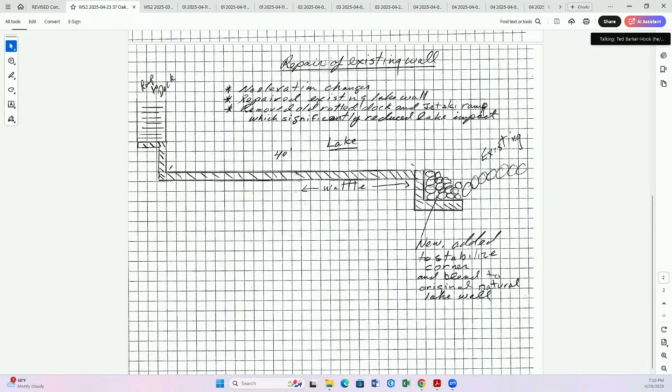I was looking at it, and I think you've done a fine enough job showing us where the wall is. Could you show me the other page again, please, Judy? Thank you. And where the dock is. So that's all great.

My initial reaction is this project is bigger than just the wall. As Judy mentioned, we do have the patio on the other side of the wall that was not originally permitted, which is within our jurisdiction. I don't see anything in your plan about the semi-repaired stretch that goes alongside the property or toward the lake. I did see that you filled it in with some gravel or cinder or something like that. I don't know if that is the permanent plan or if that is temporary to stabilize things, but there's nothing in these drawings that helps me understand that.

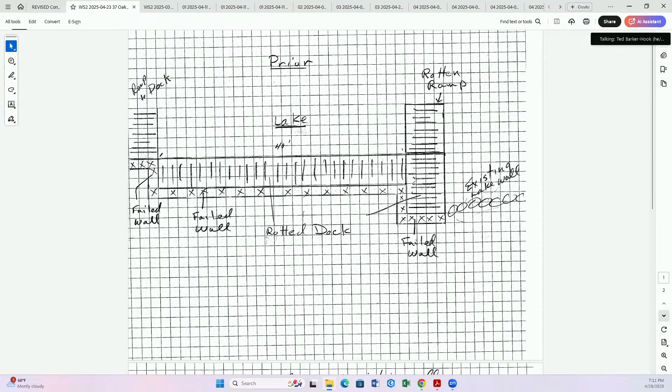Additionally, what I'd love to see on these drawings, and maybe Judy you have it, as we mentioned at our last meeting, when we've dealt with applications along Lake Maspenock, we're holding applicants to a standard of protecting the waterfront with plantings. I think Judy might have at her fingertips the information we've shared with a lot of homeowners. So what I'd like to see first is a plan that is more detailed and all-encompassing of the work that has been done and that needs to continue to be done.

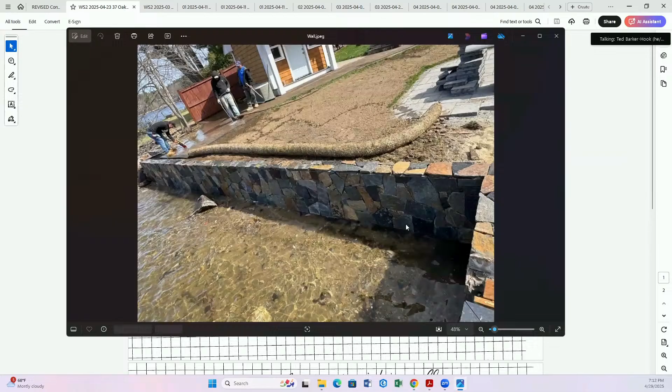And then before I open it up to the commission, a couple other things I happen to see. I'm curious, I don't think there's any description of how the wall was finished, what materials were used. I was assured the tarred cinder blocks were removed, but what materials are holding the new stones in place? What is the buffer between the stones and the cinder block wall? I would love to know more about that.

And then finally, it looks like from the photos, and that's a perfect photo for it, we still have straw wattle issues. That straw wattle right there is not staked down. And pretty clearly, if you can cursor over where there's debris right there, it's not being protected with erosion controls at all in that current situation. So I like that we're making progress is my first thought, but I think better plans and a bit more erosion control are probably called for.

Would you like to respond to any of that before I open it to the commission? Sure, yeah, absolutely. Would be happy to stake down the wattle there. And also, that's all been seeded now, that slope on the other side from the previous photo has been strawed and seeded as well.

The material that was used was natural stone veneer to reinforce the cinder block wall behind it, so that when the lake waves and everything hit it, the joints from the cinder block won't deteriorate. So you guys allowed me permission to go ahead with that work, before the water rose. Fortunately, we got there just in time to do that.

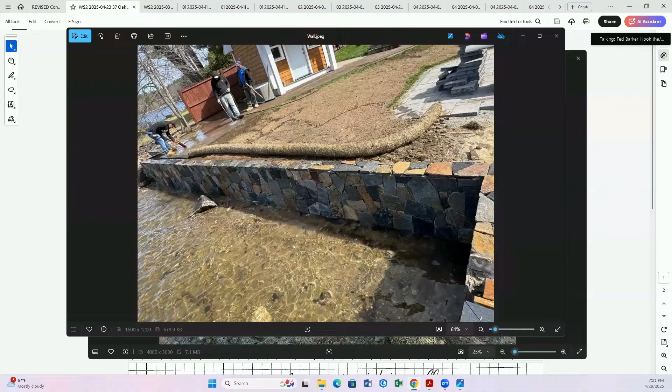That looks like a no. Through the chair, this is Ed. I just have a simple question: the height of the wall. Is it... what is the height?

I don't know, I'm guessing 2.5 to 3 feet. The elevation was never changed from the old. I'd say let's say 3 feet. I don't know exactly, but it was never altered in any way.

Anything else from the commission? Just to say hello, I apologize for being a little bit late. Oh, don't apologize, we're happy you're here. How's North Carolina? It's very windy, but it's been in the 80s, so that's pretty good.

Mr. Holmes, did you install the patio that we're seeing the edge of, or was that there underneath all the garbage when you bought the property? No, that was a part—there was a patio there. It was sinking at the time with the old dock, so we replaced it with new patio stone.

Okay, it had like an old red brick pattern that he also used for his basement floor, because his floor—he never put French drains in, so he just puts old stone, patio stone down in his basement at the time. He's clearly a gem. Yeah, oh—2 dumpsters of trash off the lake.

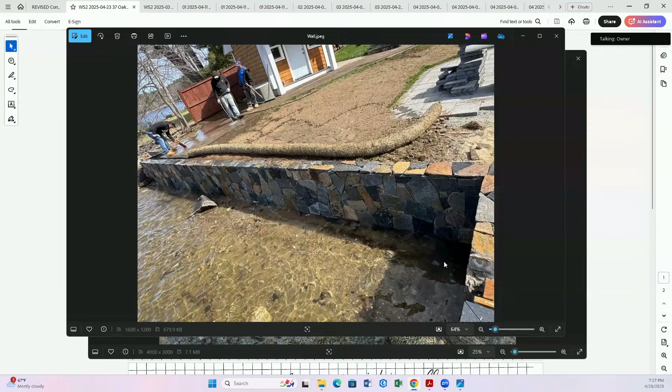Then also that slope going down, I have in the past put some down like a U shape at the very base to capture way down to the right, to capture anything during a really heavy rain, just to capture any runoff that goes down that way too. So we have it on the left side as you see it, but I think right down at the very bottom I would like to put some more down there, because after pulling so much out of that property, he buried the house two feet deep above the sills with trash. He was a very sick individual.

So you're clearly getting everything back to normal grade. I know there's certain trouble areas, and that would be one. You are clearly making it look more attractive. We just want to make sure that we do it with all proper documentation and approvals.

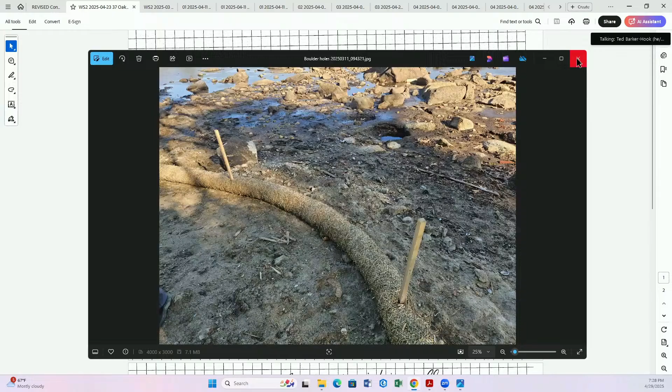All right, we're going to move on to new hearings. We have three new hearings tonight, which means I've got to read some paperwork. Let me see if I can find the first one.

Mary, what is that? Oh, it's this one, okay. This one has a lot of property locations, so bear with me everybody.

The Hopkinton Conservation Commission will hold a public hearing on Monday, April 28th, 2025 at 7 p.m. virtually online to hear all persons interested in an amended notice of intent filed by the town of Hopkinton for changes at the intermittent stream crossing to the proposed school entrance driveway. Location: 0 Hayden Row, Assessors Map U23, Block 33, Lot 0; 0 Hayden Row, Assessors Map U23, Block 35, Lot A; 129 Hayden Row, Assessors Map U23, Block 28, Lot 0; 147 Hayden Row, Assessors Map U23, Block 32, Lot 0.

LTC Myrtle Avenue? What's LTC? Help me with what that means. I think it refers to lot, but it's just how the assessors have it. Oh, LT is for lot. Lot C, Myrtle Avenue, thank you.

Lot C, Myrtle Avenue, Assessors Map U23, Block 60, Lot 0. Lot B, Fitch Avenue, Assessors Map U22, Block 68, Lot 0.

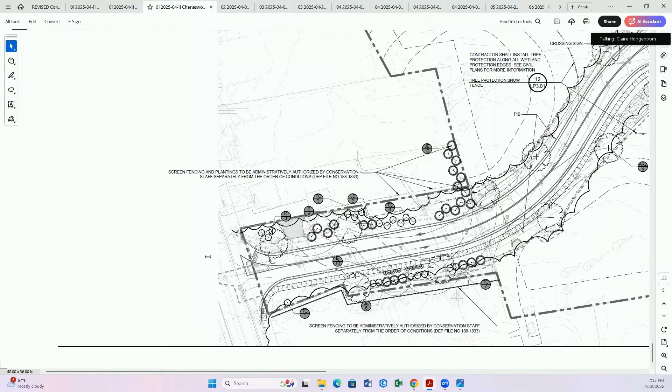The landscape plans also have only native plantings proposed within the buffer zones. That is a revision that was made. As you see, there's a couple of arrows pointing to plantings on the parcel to the north, and fences off-site on each side of the driveway entrance. Those notes specifically state that those features will be administratively approved by the conservation staff outside of this order.

Of conditions, as we discussed at the April 8th meeting as well. I believe that covers everything. I think we provided full-size sheets of these revised plans to Judy and Anna at the Conservation Office, so they have that on file. But we can provide a compiled PDF as well for your records after we get through tonight's meeting.

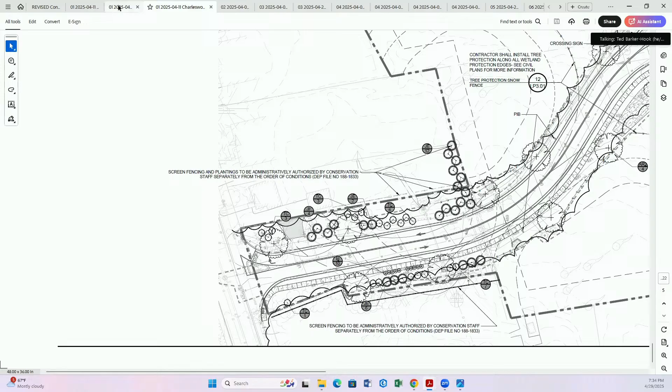Great, thank you, Claire. Neither Melissa nor Matt is here right now, and they're kind of our water experts, so I'm going to ask you to dumb some stuff down for me because I don't fully understand what I see on the plans. Could you help me understand how the two catch basins on either side of the driveway work? How does the water move? How is the water being treated as it heads back into the stream? Is it being treated? Just walk me through the flow of water.

Sure. Judy, would you mind zooming into that a little more? So you can see there's a lot of gray line work that's off-site, but on the north side where you see the wetland flags or the bank flags is where the stream flows south onto our site. At the catch basin shown above two of those flags, that's where the stream will enter the culvert, the replaced culvert, and it continues about 700, maybe more, feet underneath multiple properties, and it daylights again well south of our site.

So where you see the solid line of that replacement culvert, on the south side where there's a circle with a D inside it, that's the replacement location between that and the catch basin. So the water flows above ground north of our site, and it continues to flow through a culvert within our site as it does presently. But the culvert will just be replaced to ensure that when the driveway is installed, there's no question or risk of it collapsing after the town worked so hard to construct this project.

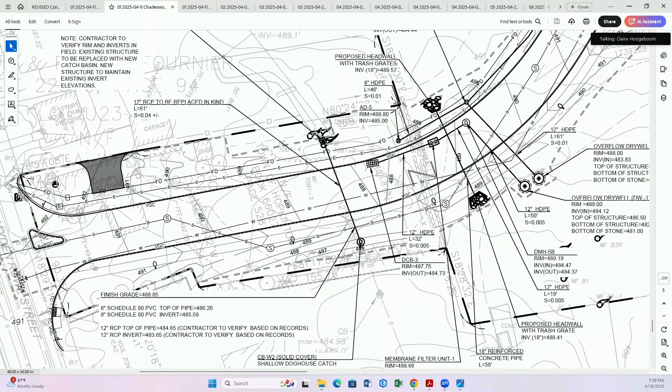All right, moving down the agenda, we have another new hearing. This is for Bay Path Humane Society, 66 Fruit Street. The Hopkinton Conservation Commission will hold a public hearing on Tuesday, April 29th, 2025 at 7 p.m. virtually online to hear all persons interested in a notice of intent filed by Bay Path Humane Society of Hopkinton for the installation of underground utilities. Location: a portion of 66 Fruit Street, Assessor's Map U3, Block 13, Lot 0, and a portion of 66B Fruit Street, Assessor's Map R6, Block 8, Lot 0.

I believe we have a representative from Bay Path here. Elizabeth, are you there? Yep, I'm here. Elizabeth, there's no reason you'd remember this, but in my very first term on the Zoning Advisory Committee, you guys came in front of us as the very first step to where we are now. So 10 years ago, Ted. Everything old is new again. Certainly is. Can you tell us about your project and why you're here?

Yeah, so if it works for everyone, I'll just do a quick overview of Bay Path, and then I believe Scott on our team will fill you in on the details. My name's Elizabeth Jeffress, I'm the executive director, I've been with the organization for 14 years. Thank you for taking the time tonight. Bay Path has been in town since 1977, so 48 years in Hopkinton.

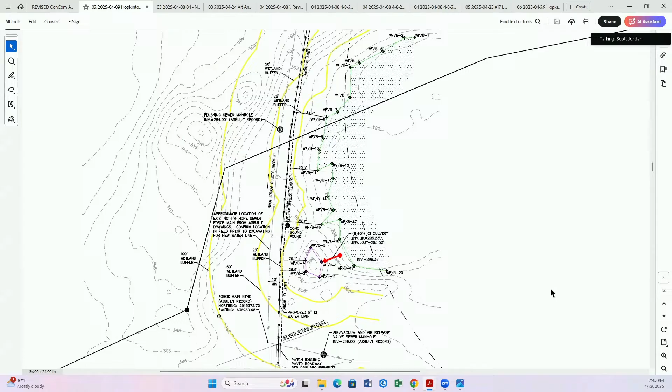Trench within an existing gravel cart path, backfill, and we'll be done. And if you have any questions, I'd be happy to try to answer them. Great, thank you very much.

So just to let the commission members know, unless something has changed since yesterday afternoon, Bay Path doesn't have a DEP number yet. Is that still true? Yes, so we won't be able to close no matter how happy we might be with all of this. So this will have to be continued later, but it doesn't mean we can't discuss it and learn about it.

Joe, have you had a chance to look at this? I have. Want to share with us your thoughts? Sure. I did get out and have a chance to review the wetland delineation, and I was in general agreement with the flagged wetlands on the site. There were a couple of flags missing around the ground, but based on the obvious slope and adjacent flags, I think the locations indicated on the plan were appropriate.

I didn't see any or find any additional wetland resource areas that would be of concern within 100 feet of any of the proposed work, not just the water line. I did walk the entire site and the perimeter of the entire site.

I did also note that although not mapped as any potential certified vernal pools out there, there were areas within both wetland C and wetland B that appeared as potential vernal pools. I didn't spend a lot of time looking for any critters. I did do a quick look and didn't see any evidence of any salamander larvae or any tadpoles or any egg masses, but I think it'd be worth a look maybe with a dip net just to verify that.

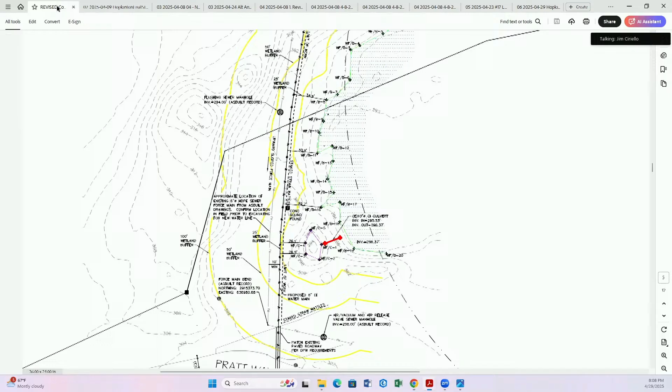We'll see you in a few weeks. Thank you all, sound like a so much. You sound like a game show host here, Ted. I sound like a game show host? Yeah, thank you all, appreciate it. I don't know how to respond to that. I don't know if that's a compliment. I don't know, say thank you. Say thank you, that's all you have to do. Okay, thank you, thank you very much. With the passing of Wink Martindale, maybe I'll step in his shoes. You forgot to say that this is being filmed in front of a live audience, too.

All right, we have another new hearing. Although it's property we've seen before, we have a brand new notice. The Hopkinton Conservation Commission will hold a public hearing on Tuesday, April 29th, 2025 at 7 p.m., virtually online, to hear all persons interested in a notice of intent filed by Yuan Li and Rui He to construct a single-family house, driveway, and associated work. Location 30 West Main Street, Assessors Map U18, Block 32, Lot 0; 0 West Main Street, Assessors Map U18, Block 33, Lot 0; and 0 Elm Street, Assessors Map U18, Block 19, Lot 0.

Welcome to the Conservation Commission. Is there someone who is ready to fill us in on what you've got for us tonight? Yes, good evening. For the record, my name is Sam Malafronte. I'm a civil engineer with Solli Engineering. Our offices are based in Norwood, Mass.

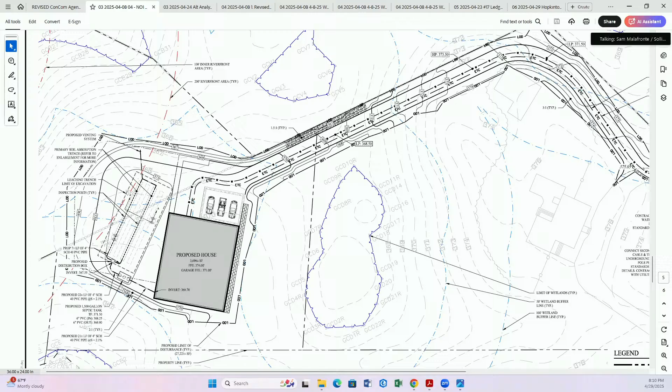Judy, I have a short presentation if I could share my screen, if that's okay. Sure, okay, make sure you have sharing privileges. All right. Don't see your screen yet. About now. Yep, that looks good.

So for the record, again, Sam Malafronte, civil engineer with Solli Engineering. I'm here on behalf of the owners, applicants, Rui He and Yuan Li. I believe Yan is on as well, I saw her name earlier. So we're here before you. As chairperson mentioned, this project was before the commission a few months ago, and it was withdrawn formally, so we could resubmit the notice of intent.

And I can just take you through a brief presentation. I'm sure you guys are relatively aware of this project site. It's basically the property between Elm Street and West Main Street. It is heavily inundated with resource areas along the northern and western side of the property, running parallel to Elm Street, the Indian Brook does. It's about 7.59 acres in total.

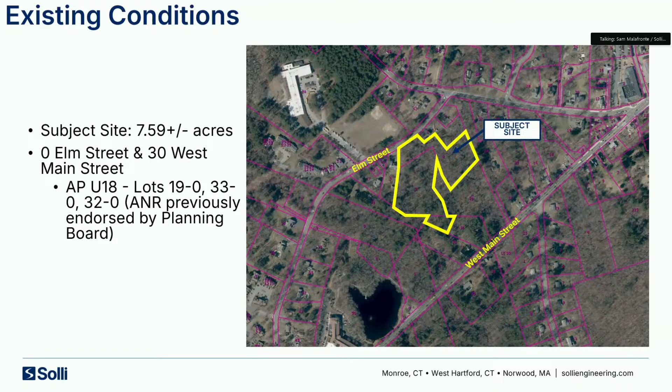The delineations were approved by this commission in May 11, 2023 under an ORAD. And this image that's shown here was included as part of the permitting plan set. It just gives a good representation of the wetland areas, the watercourse areas, which are shaded in gray. We have the riverfront 100-foot inner riparian and 200-foot riverfront shown in red, and then we have the wetland buffers 50 and 100 shown in a lighter blue.

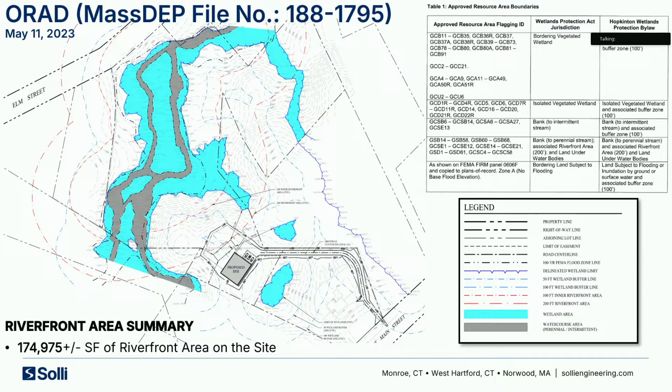Very similar to the previous application, the single-family home that is proposed is proposed to be accessed through the 30 West Main Street property, as the only accessible path to this developable upland area located on the 0 Elm Street property. I could take you through a zoomed-in image of the site plan. I know previously in the application, it was shown as 2 potential driveways. After an evaluation took place, it was determined that the eastern driveway, which was originally proposed, was the more suitable location and proposal.

So that is the path, or the project, that's proposed in front of you. We are proposing a 430 linear foot driveway. I have been in communication with the fire department - I know that was brought up by one commission member at the previous hearings. We are proposing to traverse the property line, the eastern property line, through the West Main Street property, go around the existing barn that's out there, and kind of hug the property line.

The grading has basically a 2-to-1 or 3-to-1 slope off of the driveway to minimize disturbance and impact to the property. We're proposing a geocell driveway, which is a plastic reinforced, gravel-based driveway that provides structural stability and minimizes impact to the subsoil. That's the goal of this driveway design, and it allows us to access the upland portion of the property.

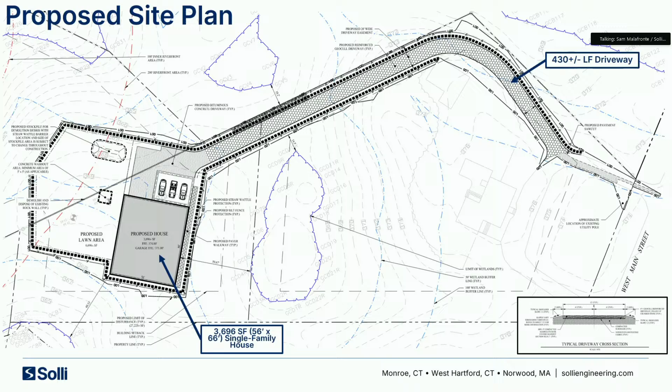Okay, yeah, I apologize, I wanted to know about the septic — the septic system. On our site layout plan, we don't have it shown, but it's shown very clearly on the grading and utilities plan as well as the overall site plan. We try to put layers on so it's easier for reading purposes.

Yeah, no, I get that. Yeah, no, I know that one. Yep. Thank you. Thank you, Jim.

Any other commission members with initial reactions or questions? I guess for initial reactions, mine would be: this is a huge project, a huge house, a gigantic backyard, and a large concrete pad on an area that only has a small upland area to build on. So that's my initial reaction — it's quite big for such a challenging, small buildable area.

Thank you, Janine. Other commission members? I would echo the general thoughts that have been expressed. Thank you, Ed. Oh, Matt, you're out of the car. I'm back in the house, out of the car. As long as you spoke up, do you have any thoughts initially, or do you want to sit on this a bit? No, I don't have any initial thoughts.

I think one thing that jumped out, we got to talk about PIDs at some point, of course. But other than that, I'd like to see this advance a little bit further, hear from Joe and get a little more info.

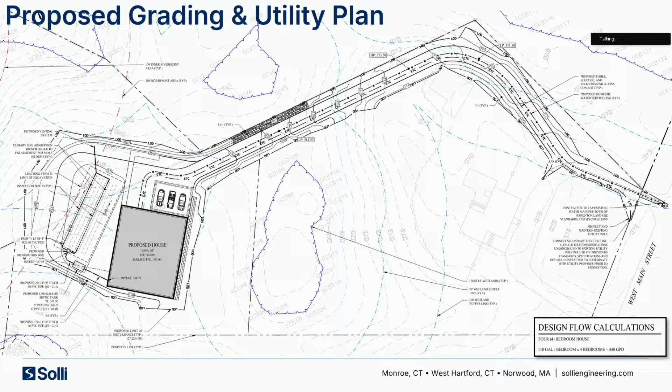Understandable completely. Any other commission members? Do we have any comments from the public? None. That surprised me. Okay, so I think what we need to do is continue, get a hold of, go ahead.

I'm sorry, Sam. I just have a quick question. Commissioner Moyen mentioned, I think, PIDs. What is that acronym? Sorry if I'm not familiar with it.

Okay, good to know. I'm sure we're going to get a comment, but I can work on getting that addressed too. Great.

Okay, seeing no more comments, are you open, Sam, to coming back on the 13th? Yeah, the 13th works. Judy, I'm not sure how long typically the turnaround for sending out comments is, but if we receive them this week, we could hopefully give them back to the town and Lucas for another review, maybe a week prior to the 13th, if that aligns. If not, we'll have to continue to a later meeting. But let's shoot for the 13th and play it by ear. Yeah, I'll get you the review this week. Okay, awesome. All right, great.

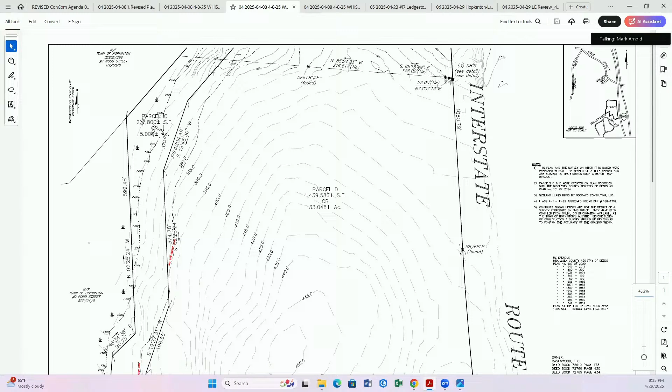The plans do show a portion of the northern end of the wetlands, although it's basically just one of the last flags that extends off to the north. That property is a separate property, not part of this ANRAD. We just show the connection. Joe, we can update the plans to pull back slightly so we show flag F29, which is on the northern property, under a separate order of conditions valid at this time. So the line shown is connecting to F29, but we can show F29 just to show the continuity of the wetlands from that northern property, which has an order of conditions, to the new property itself.

And I know you looked at that line as a whole. You just want to make sure it's shown for clarity, and that makes absolute sense, and we appreciate that's a good comment to have from you.

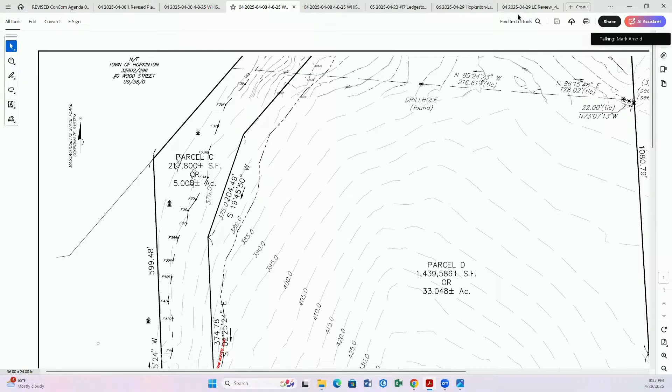The next comment Joe had was in terms of the ILSF calculation. Just to recap what we discussed with the commission at the last hearing, there are two large isolated vegetated wetlands, the S series and the T series, and we ran the ILSF calculations for both. We determined that the T series is a very large isolated wetland that clearly would meet ILSF volume calculations, so we drew the extent of ILSF based on the topography of that wetland.

ILSF is based on the ponding and flooding of a wetland to where it extends to the maximum extent, and then eventually it can't flood higher in elevation—it has to spill out, it goes somewhere else, like a dam cresting. So if the commission and Joe looked at those plans, you'd see the spot elevations at the extent of ILSF, shown in red in that exhibit plan—you start seeing spot elevations below elevation 402. That elevation is the spillover point, to where after 402 the ground drops down like a spillway of a dam, and there will be no ability for water to be retained within that wetland before it would spill out into the upland around it.

Again, this is sometimes ILSF is theoretical—if it ever did flood to a certain extent, it would raise this amount. It's unlikely unless there was a massive storm of over 100 years potentially. But that's basically the methodology that DEP has for ILSF.

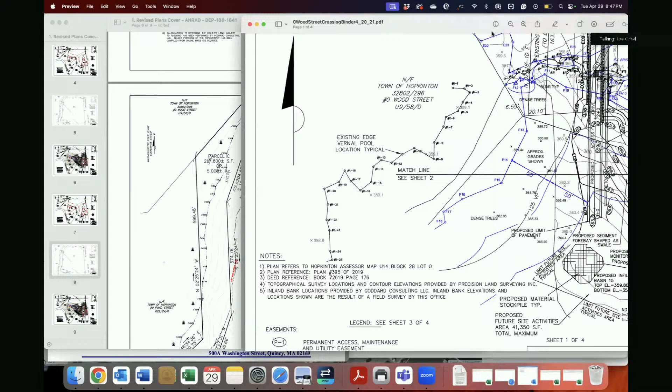Yeah, I think if you scroll to the next sheet on the order of conditions plan, where it runs south. Oh, you're right. Hold on, you're right. There we go, a little bit closer. Oh, I'm sorry, hold on, something's going on with the PDF.

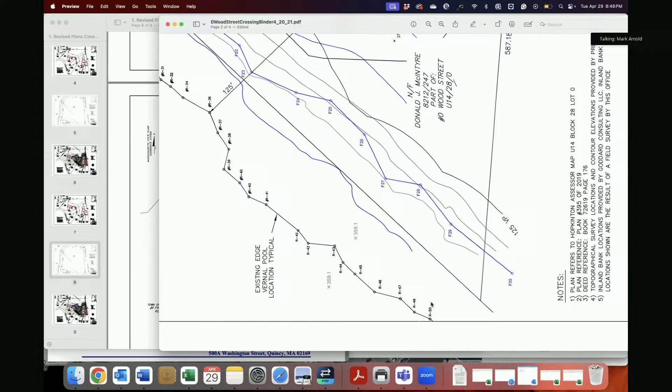So here's, yeah, so there it runs a little bit closer, but I think in a few spots it might get close to being within 25 feet, but I think... Yeah, we did have it running. Yeah, you can see it runs about over 50 feet interior to the wetland line.

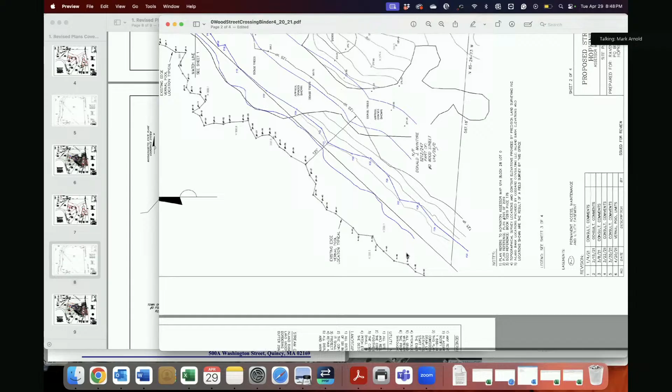Is the vernal pool itself back in that area there. But we can show, I think we might have some data above this, so we can show that data, Joe, there, just as a point of clarification. Yeah, I think it would be important just to have that buffer line on the plan, just for any potential future considerations of work in that area.

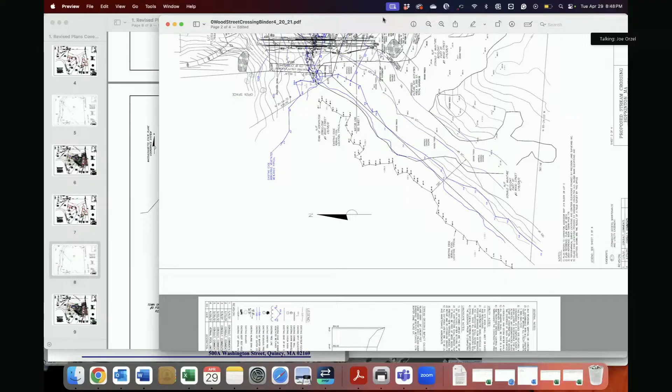Through the chair, yes. I would echo that sentiment that Joe just had for the other areas where he questioned whether or not there are vernal pools. Moving forward, if and when a project happens on this site, one of the first things I imagine we're going to ask as a commission is, are there or aren't there vernal pools? Because you're not asking for that to be decided as part of this ORAD. So given we're at the close of the vernal pool season, my suggestion would be to try to go out there and put eyes on it, and get us some information on whether or not, in your opinion, Mark, or your biologist's opinion, that there are or are not vernal pools.

Thank you for that comment. Put you in a better spot. Thank you for that comment.

You, Mark, ran through a whole bunch of stuff very quickly, and I'm impressed with Joe being able to say, wait, you didn't respond to this or that. I was not able to keep up quite as well. But Joe didn't raise this question, so you probably did address it. I'm looking at comment H about whether there is a stream or culvert present, which apparently is on mapping. Did you respond to that comment?

And if so, could you just remind me what you said? I did. There is a stream that our series of wetlands should be called bordering vegetated wetlands, so we'll update that on the plans. It doesn't really change anything else. It's just an intermittent stream, a culvert that provides hydrologic relief because of the raised roadway on Valleywood Road.

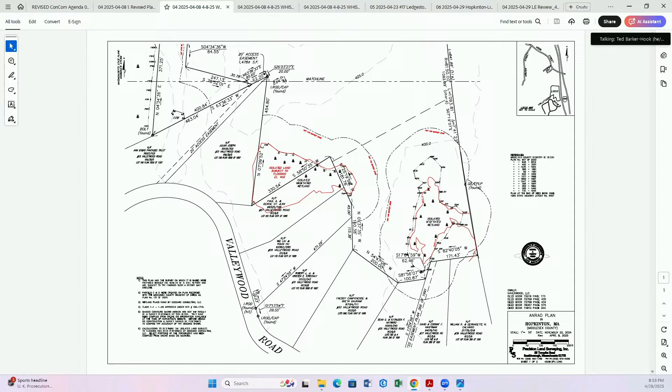Mark and Craig, we'll see you in a few weeks. Thank you so much, have a good night. Welcome. And with that, I'm afraid I need to vacate my office here at school and go home.

Just to let you know, Matt, we got through all the work session items except for public forum requests. And hopefully you saw the updated agenda that the 47 Oakhurst Road has already been continued. All right, so we've got 2 items left.

I wish I could stick around, everybody. See everyone on May 13th. Oh, I did want to say this. Commission members, Hopkintonians, please go to town meeting. I know it's a long slog. It's democracy at its finest. It's our town, please be a part of town meeting. I'll be there, I'll look to say hi. With that, I'll say good night. Night, Ted. Good night.

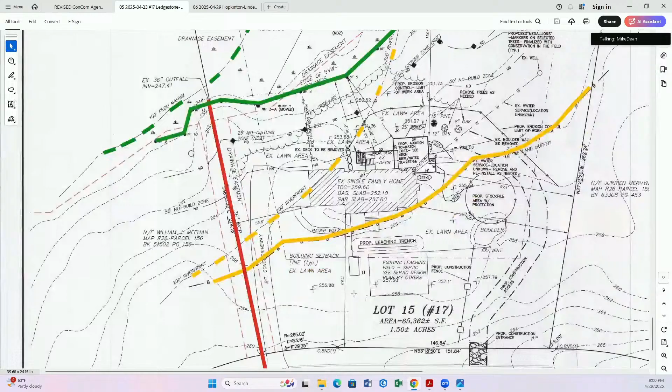Construction access has been added to the plan. Judy, if you could just scroll down a little bit, up off to the right. So there's a construction access, chosen for a couple of reasons, off to the right-hand side, and that avoids coming off the end of the driveway, the existing driveway, back on the opposite side of the house, which is in the riverfront area. So we chose this location to avoid the riverfront.

A stockpile area has also been added to the plan. That's off to the right of the house, and to the left, in that curve area of the access construction roadway, and that is outside the buffer zone.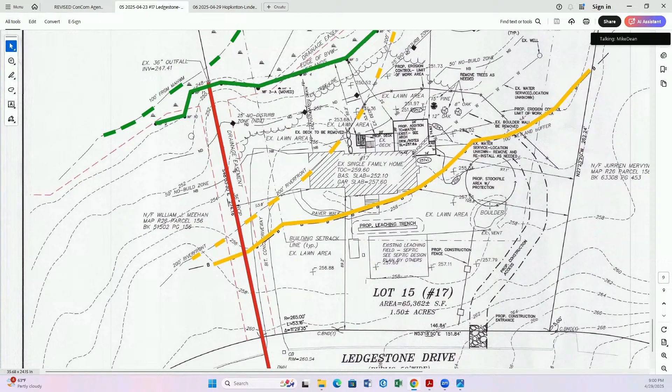Another revision was the erosion control from the original plan and the limit of work that's shown there with the line work and the X's. We've moved that in closer to the addition, and we also wrapped that right around at the 200-foot riverfront, keeping everything out of the riverfront and not accessing down through the end of the driveway.

Also in the review letter, there were some other items listed as requiring further discussion with the commission. Proposed medallions have been added to the plan, located at the 25-foot line - those are the diamonds - and a note added to the plan as well stating that those will be proposed medallions located on trees and finalized with the commission through the process. So the note even gives the ability to adjust it.

A couple of other comments in the peer review letter suggest further conversations with the commission - the lawn extends beneath the tree line, and further discussion should take place regarding the restoration of the 25-foot no disturb zone. Another item is that 3 trees are being removed for the project. Those are shown on the plan off to the back right of the proposed addition, and we should have a conversation about mitigating or replanting those.

I talked to - and I forgot to say that the applicants are online here. I'm sorry, the Collards are online also.

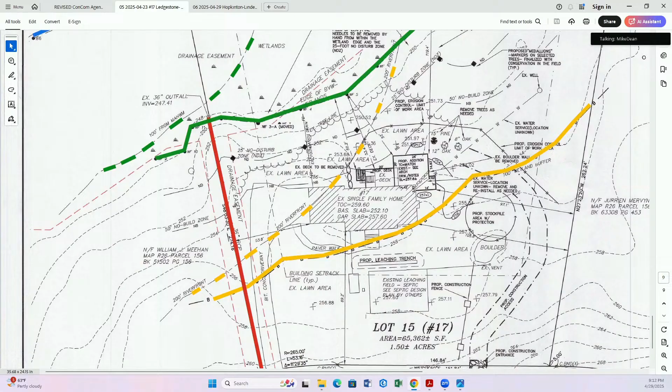Thank you, Mr. Dean, I appreciate your time. Okay, yes, thank you, see you on the 13th. Yep, thanks for your time as well. Have a good night.

All right, moving on to our last item for the evening, continued hearing for Banyan Lane and 4 Linden Street, request for determination of applicability for demolition of a single-family home and site work. Do we have a representative from the applicant on the line? Hi, my name is Ron Strohsahl from Oxbow Associates, representing the applicant, and she's also on the call, Ms. Modi.

Judy, any updates on your end since the last time we saw this particular effort?

Through the chair, this hearing was opened on April 8th, but Joe had discovered an additional channel on the east side, the adjacent property on the east side of the lot, and the applicant chose to continue to investigate that additional resource area and get it mapped on the plan. I believe they've walked the site with Joe again to confirm this new resource area and the associated buffer zone. Joe has notes on the confirmation, so I'll leave it to him to discuss that. But that's the status of where we're at right now. If you'd like an overview of the project, I think that would be another good place to start, as we didn't get that at the last hearing.

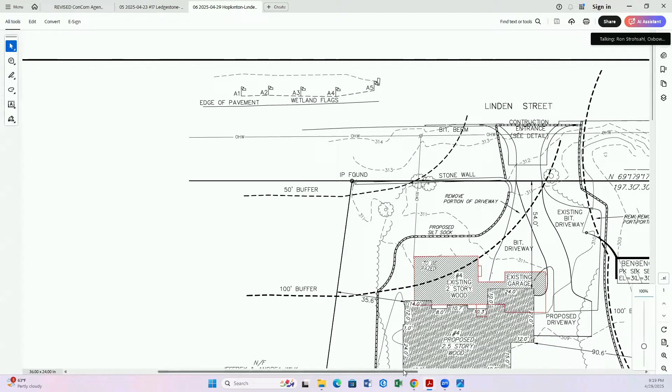It does seem to extend wider. I'm not really sure why that is. I think it might just be to show that it's there. It could simply be that. From my perspective, it would be great to see that limited to the existing footprint of the driveway and not create unnecessary disturbance. That makes sense. I think it may just be an access issue in terms of truck traffic, they may need to widen the existing driveway. That's just what I'm thinking. But if not necessary, yeah, I wouldn't want it. No, it's not necessary. Make it as narrow as possible.

Absolutely, I think overall this is a strong proposal. It's great to see that this existing driveway is going to be converted back to vegetation. The house has been strategically placed outside the buffer zone, and we certainly appreciate the thoughtfulness there. So I'll open it up to commission members if they have any questions, comments, or thoughts.

Going once. All right, sounds like we're all good on that front.

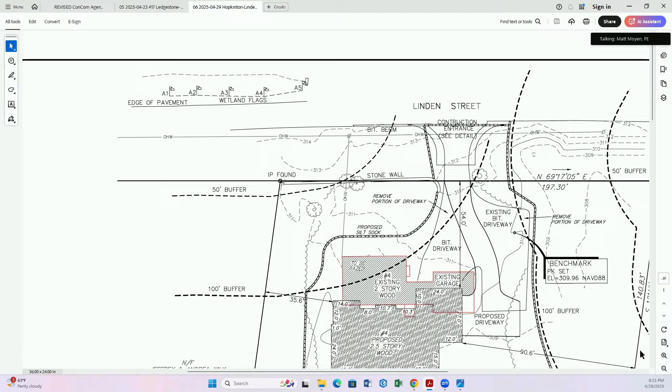I would personally be comfortable moving forward with a negative determination, with a condition that PIBs be placed at 40 feet on center along that eastern tree line at the 100-foot buffer zone line, with signatures by Judy or Anna.

If you're looking for a motion, I'll make that. I'm happy to take a motion if we're ready. I'll make that motion. Second. We'll do a quick roll call. Janine? Aye. Jim? Aye. Ed? Aye. Heather? Aye. And I am an aye.

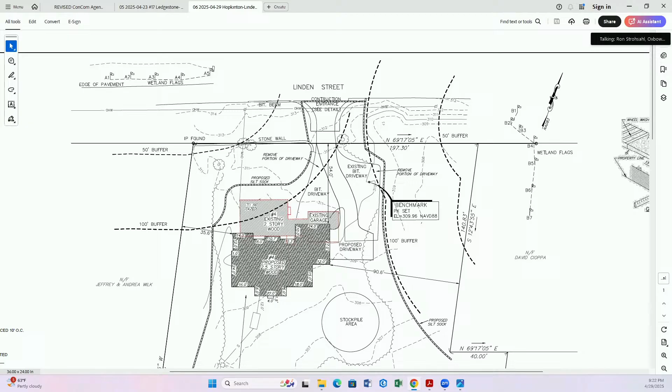Judy, any public forum requests? Nope. All right, we've made it through.

All of the heavy lifting was done by Ted, and I got to do a little cleanup work. Great teamwork, man, great teamwork. Yeah, you guys are great. Thank you. Anyone else have anything they want to talk about tonight while we're here?

Well, you want to talk about fishing or the sun or something like that? We did do some fishing on April vacation last week, caught a whole bunch of fish down in Florida, it was a lot of fun. Oh yeah, well I started fishing down here in North Carolina, but it's a little too windy and too much surf. Oh well, it'll be a good day. Hopefully better ahead.

Our fearless leader appears to be doing well. I'm not quite sure how public we can be, but everything I'm hearing is good. Good, that's great to hear. Thanks for that update, yes, the update is much appreciated.